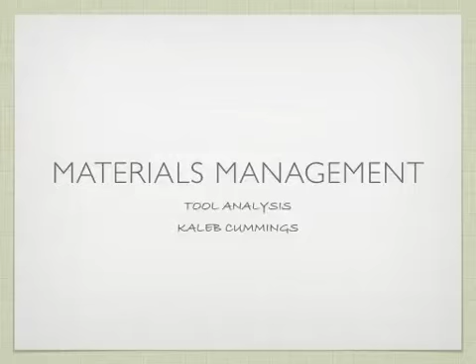What is materials management? Is it making sure that you have enough materials? Is it making sure you have the materials available when you need them? Or is it simply minimizing the waste on a project? How do we define materials management?

Safa, Shahi, Haas, and Hipel describe materials management in their article in Automation in Construction as the planning and controlling of all activities necessary for ensuring and confirming that the correct and accurate quantity and quality of materials and equipment are appropriately specified in a timely manner, obtained at a reasonable cost, and are available when needed.

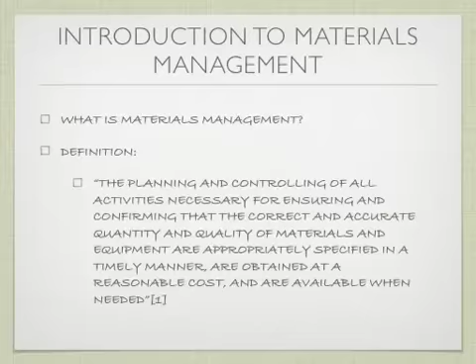So, what all does this entail? It means sourcing suppliers that can provide not only a product that meets the quality specified by the architect or designer, but also meets the budget and has the ability to be provided in line with scheduling needs.

It also means getting the appropriate amount of these materials in order to maintain budget while still allowing for errors, damage, or any other unforeseen circumstance throughout the procurement and delivery process in order to not delay the progression of a project. Last, it also means making sure that materials ordered are used in the most efficient manner to minimize waste and human error.

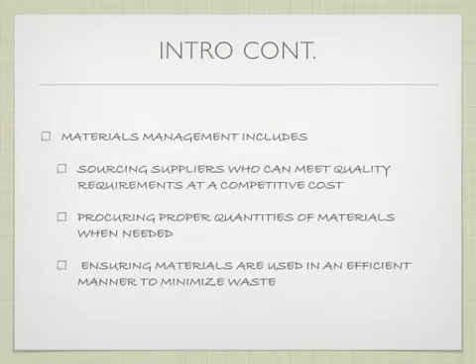Why do we need to use materials management? The primary reason is that the cost of materials can amount to somewhere between 50 and 60% of the overall project budget. And managing, procuring, and obtaining these materials or equipment can account for nearly 80% of the project schedule.

When you look at a typical project management system, it is primarily focused on the execution and implementation of the project, while those aspects may only make up less than half of all costs associated with the project.

On complex projects, the percentage of the budget that materials make up can reach nearly 70%. This can be seen on heavy industrial plants such as refineries and even on cruise ships and offshore oil rigs in the construction of those items. In fact, the oil and gas industry and the shipbuilding industries have given this information and the technologies to the engineering construction industries because these areas of the industry have such a high material to budget ratio.

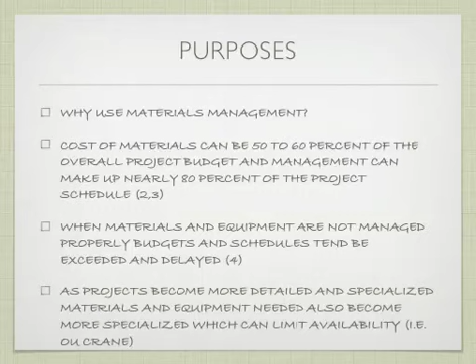In addition to projects becoming more complex, schedules are becoming more compressed as owners want their buildings faster, and generally when they need them more rapidly, it's because there's a lot more money at stake, especially when you look at high revenue producing projects such as gas processing facilities, refineries, and other structures that can potentially create large value for the owner.

This means that many activities need to be occurring simultaneously on the project, and that makes more items critical to the process and puts them on the critical path, which allows more chances for delay on a project, because a simple delay in the critical path, perhaps due to materials being late or equipment not being available, can significantly affect the project timeline.

Simultaneously, more items, especially long lead time items, are on the critical path, and many of the suppliers of these items are keeping less in stock and less in inventory to reduce their inventory overhead. Oftentimes they will only produce items on demand, which can increase the lead time for some items tremendously due to setup and production times. It isn't uncommon to have specialty items be out 6 to 8 weeks, if not 3 to 4 months in a lot of cases, depending on where you have to procure your items from.

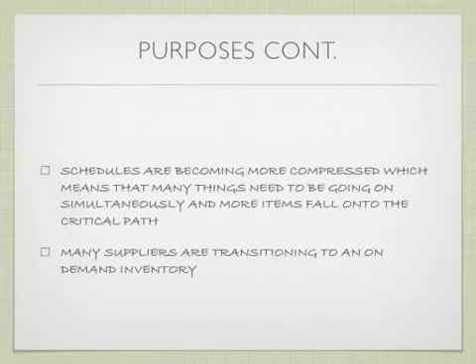Planning is vital to the success of any construction project, but it is especially key within any materials management system. Often materials planning includes vendor evaluation and selection, which may or may not be with a detailed analysis through an integrated construction material management model, which I will discuss in further detail later.

Material takeoffs of prefabricated, modular, bulk, and built-in-place items. Purchasing and transportation of materials to the site. The transportation must take into consideration things like oversized loads, hazardous materials, removal of waste materials, and other items, potentially a pre-standing structure or existing conditions, and minimizing the disruption to the public from inconveniences, whether it be deliveries or equipment moving or road closures due to an extremely oversized item.

Throughout this process, it is extremely important to be in contact with subcontractors. This is because subcontractors supply a majority of bulk materials and small equipment. For example, electricians are going to supply all of your wires and all of your light bulbs and those types of items, your conduits and all that. It would be unnecessary, and most of the time the subcontractors are going to be unwilling to allow the project manager or the prime contractor to purchase this material, because that is a way that they make some of their money, through the profit and overhead on those materials.

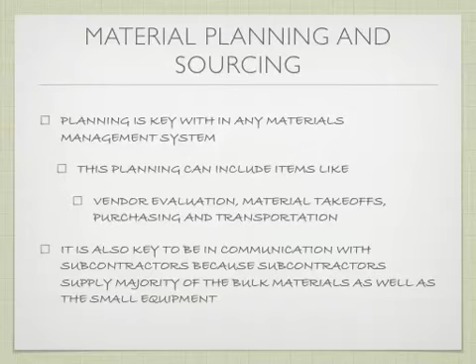There are several tools that can be used in materials planning. The first is a bill of materials that is typically used for composite elements that are made up of various items and may have multiple trades associated with them. These bills of materials make an easier way for subcontractors and suppliers to be able to price out these materials without having to analyze the entire assembly.

The second are quantity takeoffs and material coding systems. These two items are typically used in conjunction, and for an effective material management strategy should be used in conjunction, and can be used to track various materials during the project, as well as provide a reference at the end of the project to see what errors may have been made in the procurement of the materials for the site, or to see how effective a waste management strategy was.

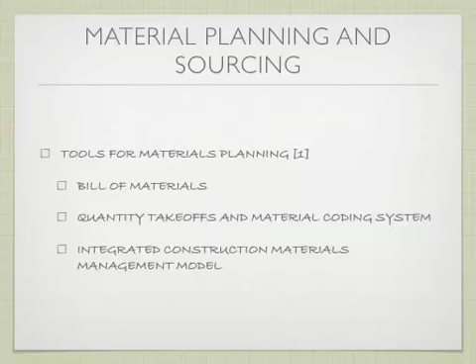Last is the use of an integrated construction materials management model. This model is typically used for the purchasing and procurement of materials, as I mentioned earlier. It can also be used for the evaluation of suppliers for selection, analysis of supplier and subcontractor proposals, and can be used to deliver purchases, inspect goods supplied, and maintain records. Often the bill of materials and quantity takeoffs and material coding systems are a part of this integrated construction materials management model, and are in essence a simplified ICMM model, each on their own.

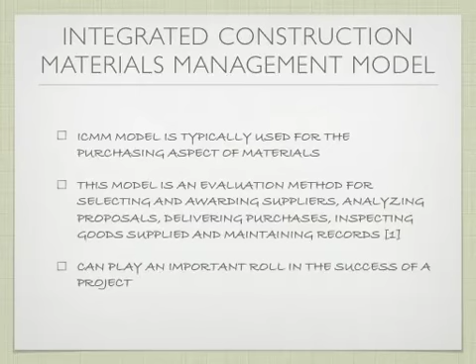When using material management strategies on projects, the ICMM model can play an important role in the success of a project, and having a more detailed model can further increase the success of the project.

Material scheduling is another important aspect of any project. Materials need to be scheduled so that they arrive in time not to delay the project, but not so early that it crowds the project due to limited storage, or that there's a chance that damage may happen to the product. As mentioned earlier, delays in material arrivals may impact a schedule by significant amounts. Typically, a delay on arrival could cause a delay of the project by more than simply the days that the material was late. Crews may have to be rescheduled, or equipment may have other priorities, and typically the delay could grow.

Many projects have begun to use radio frequency to track materials progression through production, transportation, and installation, which is giving contractors more reliable data to estimate durations for procurement.

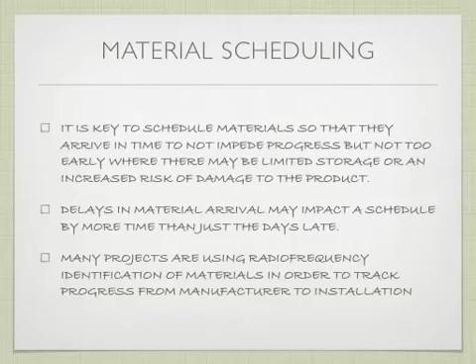And the last item, one of the most important material issues across the industry, is project waste. Waste affects everything from LEED credits to cost and scheduling. It is a truly universal project issue. All projects have some form of waste prevention strategy in place. These strategies include well-organized purchasing, proficient ordering of materials, and an effective delivery schedule, meaning that you don't waste valuable equipment time, whether waiting on a truck to arrive to unload or having not enough evenly spaced deliveries to warrant certain equipment to offload materials.

Effectual storage, which is to prevent damage or deterioration of products. Maximization of reuse and prevention of rework, which is the largest cause of waste on projects, whether due to human error or design changes in mid-course.

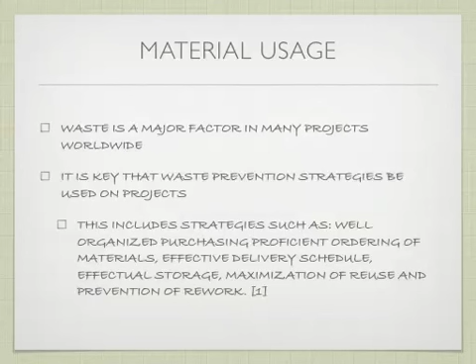In conclusion, each company typically has their own form of a materials management system. Some may be more elaborate than others, but everybody tends to have some form of materials management. It is key to evaluate what works most effectively for each company, because each company is different, and provides the greatest amount of success without being an excessive process, meaning that it should not be a process that does not add value. It should always add value and be effective while adding value. Once it becomes too cost ineffective, that's when it needs to be reevaluated and appropriately scaled.

Utilizing supplier evaluation techniques, scheduling and coordination aids, and waste prevention techniques can reduce cost overruns and schedule delays, which further contribute to material management.